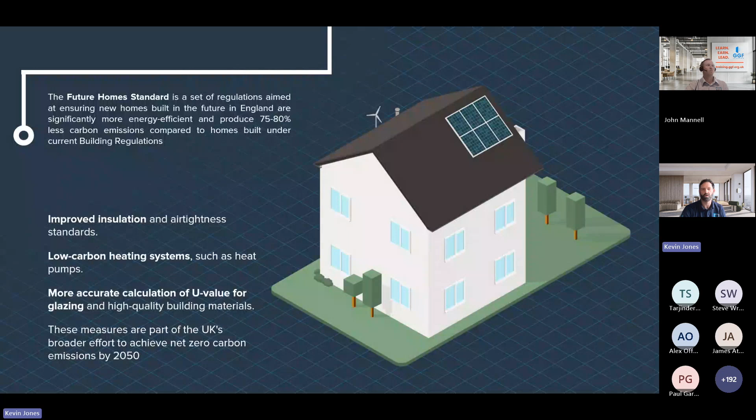So now we'll look at some of the ways that the Future Homes Standard aims to improve building performance.

First up is energy storage. Homes are expected to more frequently incorporate on-site energy storage to better capture and use low-carbon electricity generated within the dwelling.

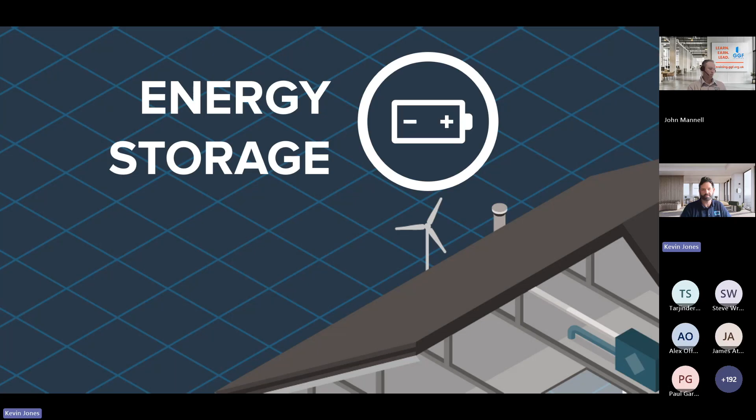Solar panels. Solar PV will become a more common feature on new homes to offset operational carbon emissions and reduce reliance on electricity from the grid.

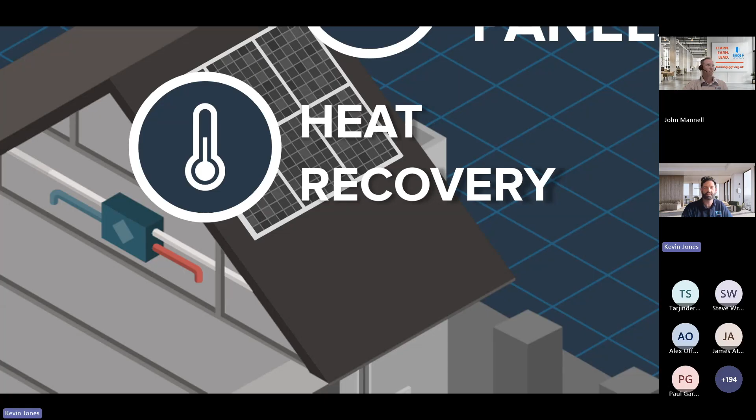Heat recovery. Greater use of mechanical ventilation with heat recovery is anticipated to retain warmth in highly insulated, airtight homes.

Increased loft insulation. Loft insulation levels will increase to further reduce heat loss through the roof and support lower space heating demand.

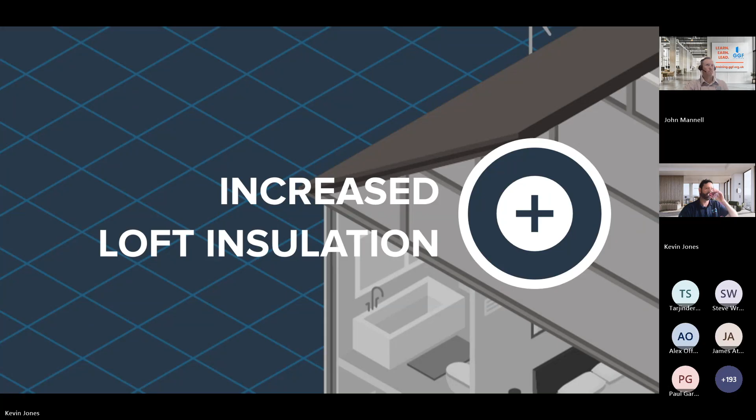Increased wall insulation. Wall insulation standards will be strengthened to improve thermal performance and minimize the fabric heat losses.

And we have an increase in air tightness. The air tightness requirements will tighten significantly, placing greater importance on detailing around openings such as windows and doors.

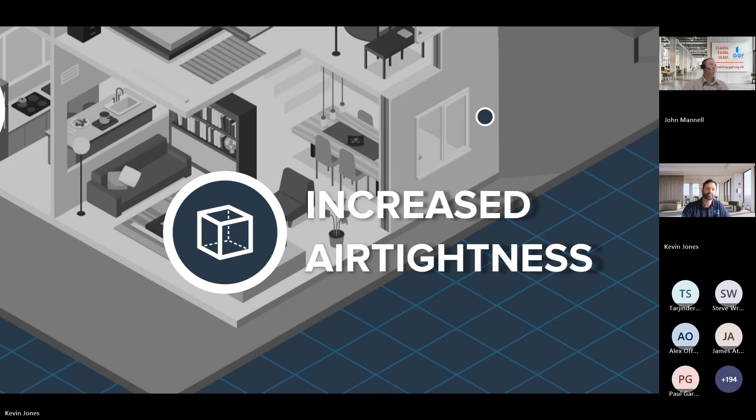And of course, high performance windows and doors. Windows will need to deliver consistently lower U values and improved real-world performance, making specification and installation critical to overall compliance.

So within the Approved Document L1 for dwellings, we have a small change in the wording, which presents a massive impact on the supply chain.

So we'll focus on the updates in Approved Document L1 for dwellings, which, as part of the consultation, has undergone a title change from the Conservation of Fuel and Power to the new title of Energy and Greenhouse Gas Emissions. There have been some small changes in the wording, but as I said, they will have a big impact on the door and glazing supply chain.

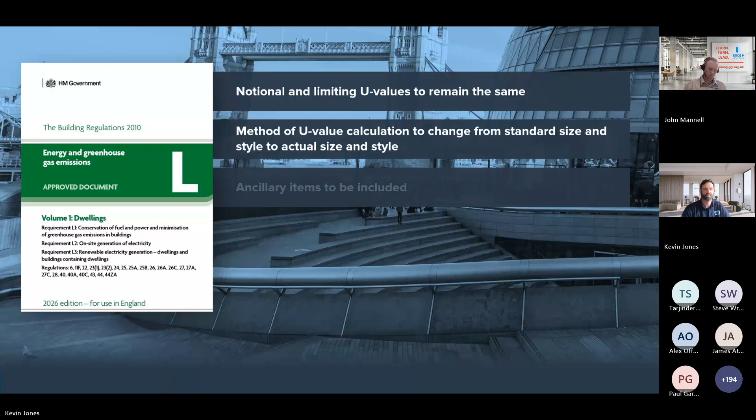The publication of ADL Volume 1 for dwellings has confirmed much of what the sector had been preparing for following the MHCLG consultation process. From a technical perspective, notional and limiting U values remain unchanged, providing continuity for specification, but the method used to calculate those U values has changed quite significantly.

Ancillary items are now included, increasing the scope of what must be assessed. There is a significant increase in calculation requirements because of the method of calculation change. In some cases, compliance will drive the need for triple glazing.

Overall, the published standard confirms the central role of fabric performance, and particularly windows and doors, in achieving compliance under the Future Homes Standard. Now we can look at each of these in a little more detail.

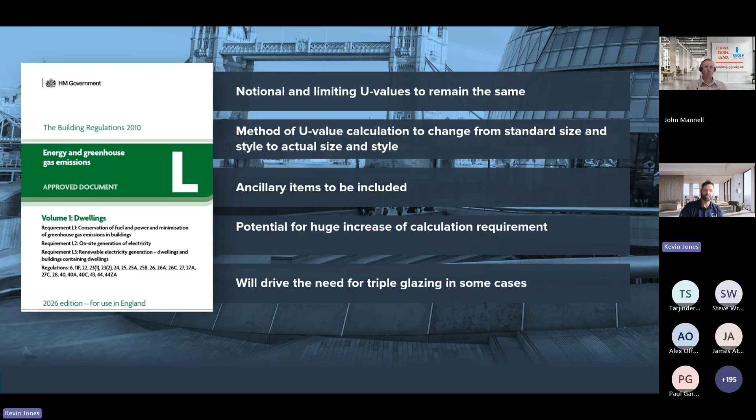So notional and limiting U values remain the same. Notional U values for windows and doors with more than 60% glazed area are 1.2. For doors less than 60% glazed area, the notional U value is 1. The limiting U values for all of these products is 1.6.

All of these U values are now area weighted averages. Whereas previous versions of approved document L presented a notional and limiting U value that applied to an isolated one-off frame, we now have an area weighted average of the windows and doors across the dwelling.

So now is also a good time to talk through what the difference is between notional and limiting U values are and why we have both.

So a notional building U value specification has existed for some time. Within it are U values for lots of different building elements, including walls, roofs, and of course, windows and doors. This specification is a recipe of sorts, with each building element representing a different ingredient.

It is possible and perfectly acceptable for a building designer to change the recipe. For example, they may choose to improve the wall insulation from 100mm cavity to 150mm cavity. By doing so, it would allow for a relaxing of a different element, with the increase in wall insulation making up the difference.

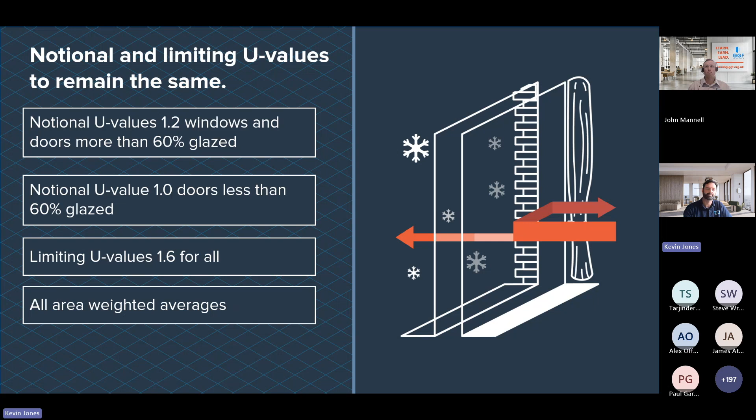So now we can take a look at U-value requirements for fire doors, and this slide breaks it down eventually into new build and domestic replacement as well.

So for new build, we have a notional U-value for fire doors with more than 60% glazed area as 1.2, and for notional U-values for doors with less than 60% glazed area, the notional is 1. The limiting U-value of these for new build is 1.6.

When we come on to the replacement market, you can see that the limiting U-value for replacement fire doors is 1.8. This is one of the few queries that we've posed to government, as the products are often the same for both new build and domestic replacement. Early consultation discussions with MHCLG were had about both new build and domestic replacement fire doors having the same limiting U-value of 1.8, due to the complexity of products and challenges they present when it comes to U-values.

We have quite a list of queries that we've sent to government for a number of items within the documents, both the English and the Welsh versions. As soon as we get answers to a lot of those queries, we will publish those through our LinkedIn, through our socials. So keep an eye out for those, because there are quite a few big questions that we've got.

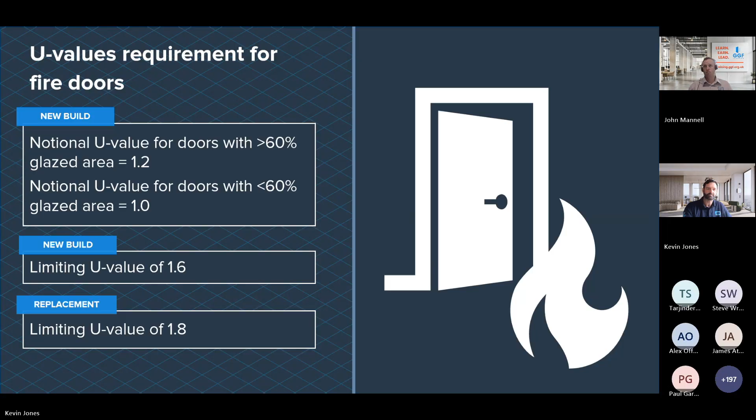This is a side-by-side comparison of the new and old approved document L1 publications. The new document is on the left-hand side. The first comparison is the method of calculation for U-values for windows and doors. The 2021 version on the right shows windows and doors as separate sections: section 4.2 covers windows, and section 4.3 covers doors. In the 2026 version, on the left, they are now together, all in section 3.2, which covers windows and doors together for new dwellings.

This is where a small but significant change has been introduced. Option B of 4.2 and 4.3 in the 2021 version has been removed, so no longer can we rely on the standard size and style method of calculation.

Historically, we've been able to calculate a single window at 1230 wide by 1480 high, including a side next to fixed style with a central mullion. Once you've calculated that one single window, we're able to apply that result across the family of products, no matter what the size and style that were actually installed. That gave us a single calculation which covered the family of products, and you didn't have to calculate the individuals. The removal of this option only leaves us now with two choices.

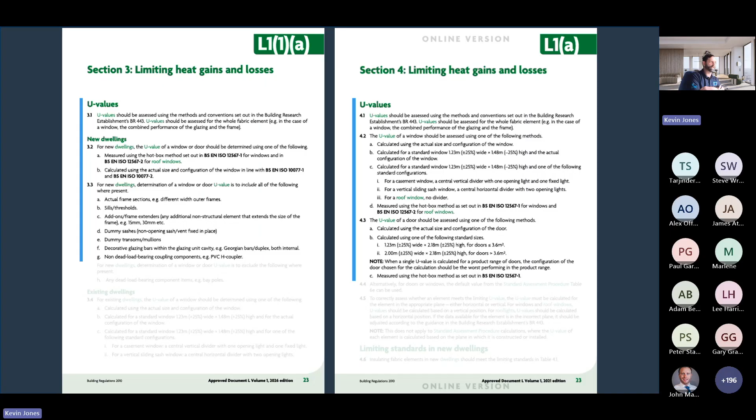We can go down the list. We've got actual frame sections, for example different width outer frames. So if you have a window where you're using a large head, perhaps to allow for trickle ventilation, then that window frame needs to be calculated with the large head, not just an intermediate, which is what we would have done historically. Any sills and different thresholds, the actual sill or threshold on the product will need to be calculated going forward.

Add-ons and frame extenders — any additional non-structural element that extends the size of the frame. On a PVC window, for example, it would be very common to use a 15mm extender or 30mm extender if you were installing into a check reveal. Or certainly on an open-in door, very common to see a 15mm add-on applied to an open-in front door. So these frames will now have to be calculated including that add-on section wherever it appears. Also dummy sashes — non-opening sash or vent that is fixed in place — and dummy transoms and mullions as well.

These are very common to improve the aesthetic of a site, very often found at the curbside facing side of the site for that curb appeal. But these do have an impact on the U-value calculation, which we'll talk about a little more in a moment.

But if you have windows that employ dummy sashes and dummy transoms, these will also need to be included in those calculations. And it's also stressing the fact that decorative glazing bars within the glazing unit cavity, for example Georgian bars or duplex, need to be included in the calculation.

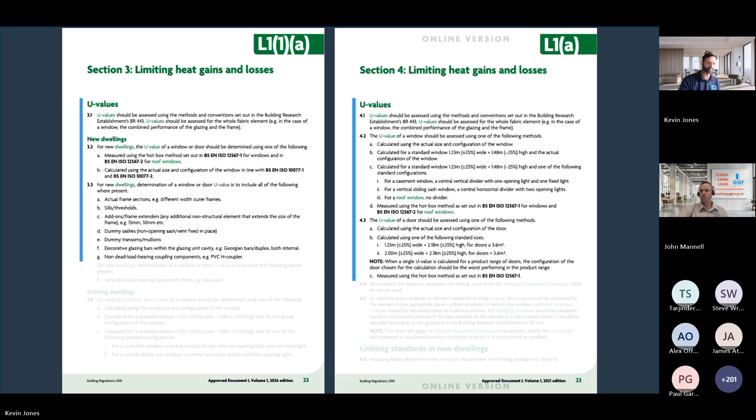So there is one notable exception to the inclusions list, and that is dead load bearing components. These are to be excluded from the calculations. The rationale behind this is that these components, structural bay poles are a good example of this, are designed primarily to take a load. To improve their thermal efficiency would likely reduce their capacity to take the loads that they are intended for.

Okay, so businesses at the moment are looking very carefully at their family of products and trying to put into buckets, if you like, which couplers are dead load bearing and which are primarily for connection of one frame to another, or to enable to achieve the correct wind load capacity.

So in those scenarios, if you're just connecting frames, or if you're using a coupler for wind load bearing capacity, then those will need to be included in the calculation for U-value. If you have items that are designed to take a dead load, such as two-part structural couplers or structural bay poles, then those elements are not included in the window calculations.

The GGF is working on a support document for approved document L, which details all of these different items in much more depth. And we have examples of diagrams, general arrangements, and cross sections in there that cover PVC, aluminium, and timber frames across all of these options. So, and that document should be published within the next 6 to 8 weeks.

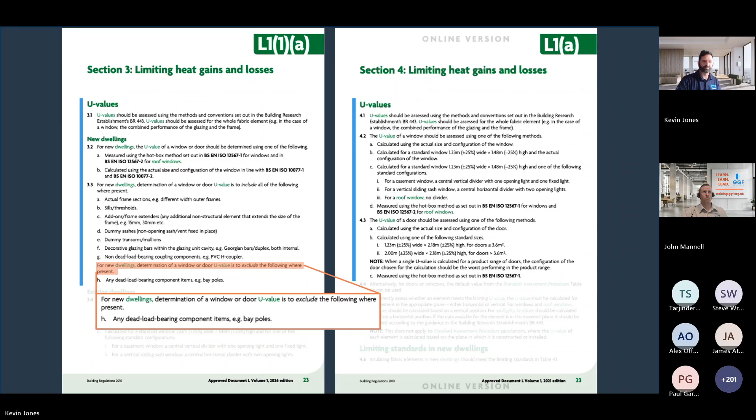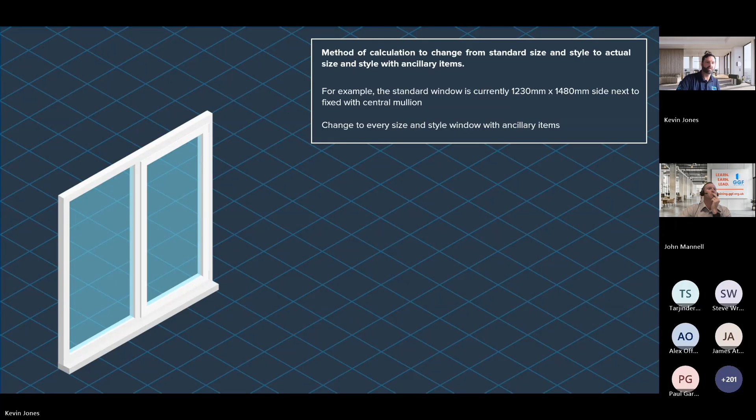And then we can see the dummy sash coming into it. Dummy transoms. And of course, the Georgian bars or decorative glazing bars, could be duplex back-to-back spacer as well. So as you can see there, that's the final window with all of the items added, with the exception to add-ons. So all of those will have to be included in the calculation going forward.

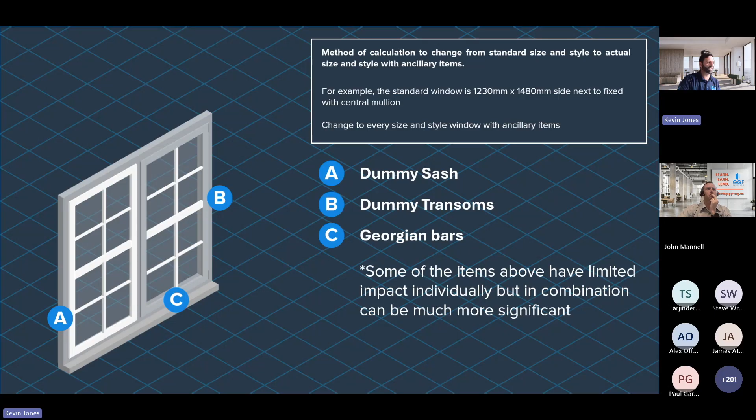And now we can look at a generic window system that we had calculations for, just to see what impact they actually have. So this slide shows the compound impact on U value from some of the ancillary additions that we've spoken about. And first we start with what was the standard size and style window, and that gives us in the top right there the standard U value of 1.266.

So that U value for declaration purposes will be rounded up, so we would get a 1.3 U value with the standard window specification. When we add the dummy sash into it, we're looking at a 1.269. So as you can see, very, very small minor difference there. Wouldn't make a difference on the rounding up or down. Then as we add in the dummy transoms to that, it takes it to 1.319.

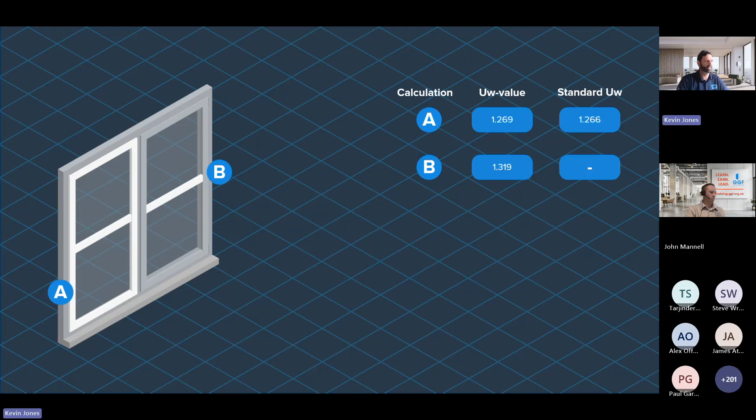So we're starting to see an incremental difference there, the compound effect of these different elements, but still not a huge difference to make much of a concern. But then when we start adding in the internal decorative glazing bars, such as Georgian, that is quite a jump. We're now up to 1.446. Bearing in mind, this is a specific window system, work we did with other systems would push that past the 1.45 round, which would round up to 1.5. So potentially you're seeing a 0.2 difference in performance from adding those three items.

Where you see a much more significant difference is if you change the Georgian grid to an aluminium duplex back-to-back style spacer bar, then we start to see a much bigger difference. We're up to the 1.6 rounded now. That's quite a difference, and it would take a very good triple glazing specification to bring that particular window back down to your 1.3 or even 1.2 if that's what's being asked for.

So window and door design needs to be considered now more than ever before. It could push projects into full triple glazing in some cases. So communication with the builders and building designers has never been more important.

As examples, we've been in contact with some house builders discussing the importance of window design, where they need to consider now, if they want the dummy sash, dummy transoms and the Georgian designs for example, that it's likely to push the specification into triple glazing, which is fine if that's what they're happy doing, but obviously there's a cost implication to them. What we didn't want them to do is carry on specifying these designs of windows without understanding the impact that it will have on the calculation and indeed the glass specification going forward.

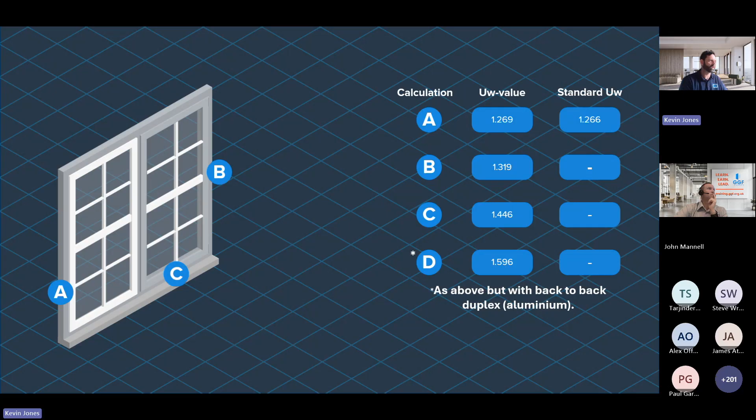So as I said, we've been talking to lots of house builders, making them aware of these changes and the impact that window design and door design can have on the final calculations.

So we can now go through the change in thermal modelling software for buildings. Historically, we have always had SAP software for modelling buildings. This will change in the near future. The new software that will replace SAP is called the Home Energy Model, or HEM for short.

Unfortunately, the Home Energy Model software has been delayed. We are told that the delay will be for at least 3 months from the date of publication of the document. That was the 24th of March. So at least a 3-month delay from the 24th of March.

In response to that delay, a new updated version of SAP has been developed called SAP 10.3. This is available immediately for use. To aid developers with the eventual change from SAP to HEM, both software options will run side by side for at least 2 years after the HEM is launched.

So government have advised that they will give industry at least 6 months notice of the phase out of SAP 10.3. So we have at least a 3-month delay to the Home Energy Model, and people we're talking to within industry actually expect that to be possibly more than 3 months. Then as the HEM model comes online, it will run concurrently with SAP 10.3 for at least 2 years. And then we will get at least a 6-month notice period from government to say we're changing over at this point in time.